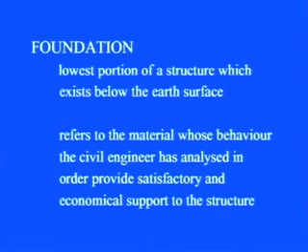Now, these foundations may be classified as different types of foundations, and as we know, they are below the earth surface, then they are out of sight. So although out of sight, the foundation is nonetheless important, because if it is deficient in design or construction, the entire building or superstructure is at risk.

And you can take the Leaning Tower of Pisa, Italy as a classical example for this. You must have heard that this Leaning Tower of Pisa was leaning towards one side. Now it has been replaced or erected to its vertical position very recently, in 2001.

Now, the function of the foundation is to transfer the load of the structure to the strata on which it is resting, and mostly it is the geological strata that consist of either soil or rock.

Now, in order to design, there are certain important considerations. One of the important considerations is the stability against shear failure. When we say shear failure, we mean that the shear stresses which are there in the soil below the foundation are within permissible limits. So they are related to the shear strength of the soil.

And another important criteria is that the foundation must not settle beyond tolerable limits to damage the structure. Now, for different types of structures and different types of soils, there are various permissible limits suggested by Indian Standard Code, and these limits are based on the performance of the structure. Let us say if a structure settles by more than a permissible value, then it may impair the functioning of the structure.

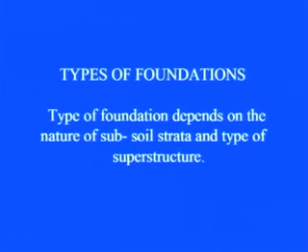Now, there are different types of foundations. Foundations may be considered as rigid foundation or flexible foundation, and foundations may be considered depending upon the depth of the foundation. The type of foundation depends on the nature of the subsoil strata and the type of the superstructure. Broadly, we classify these foundations either as shallow foundations or deep foundations.

Now, in shallow foundations, it is an arrangement where structural loads are carried by soil or rock directly under the structure. In most cases, it has been found that the depth to width ratio is kept less than 1, and this is defined by various researchers, especially Terzaghi, who gave the criteria that if the depth of the foundation to the width of the foundation is less than or equal to 1, it will be treated as a shallow foundation.

Now, in case of shallow foundation, there are many other types, and some of them are like spread footings and mat foundation or raft foundation. Spread footings, strip footings, continuous footings, rectangular footings, combined footings, all these come in the category of shallow foundations as long as this depth to width ratio is less than 1.

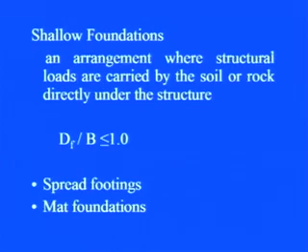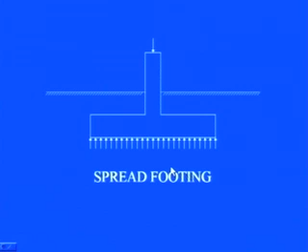Now, in this figure, you can see this is a foundation. There is a column, this is a column foundation which is a spread foundation. This load is taken up by a larger area of the soil, and this foundation is in direct contact with the soil. Now, the total load imposed by this particular column foundation, one of the columns of the superstructure, is taken up by the soil below, which may be soil or rock.

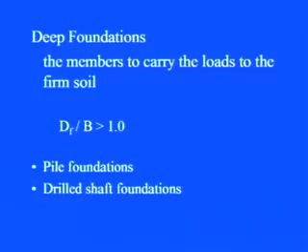In this particular case, these are the structural members called piles. Piles may be of different materials. This material transfers the load from the superstructure to the subsoil - that is the member, and this member is that foundation. The resistance is offered by the skin friction between the member and the soil, and the end bearing of the pile tip.

In the case of shallow foundations, the complete load is resisted by the end bearing, whereas in the case of pile foundations it is resisted by the end bearing as well as the friction between the soil and the member.

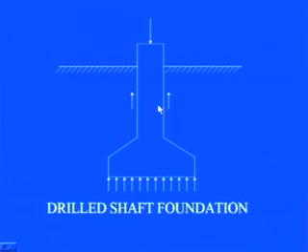Another example is the drilled shaft foundations, used maybe for the bridge pier and other structures. The important criteria which we have seen is that the foundation must not fail in shear - that criteria is the stability against shear failure.

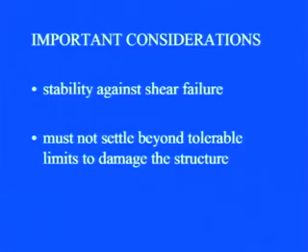It has been found that the factor of safety in shallow foundations is always kept such that the foundation does not fail in shear. Mostly the failure takes place due to excessive settlement, and especially differential settlement. We will have to keep this differential settlement within permissible limits, because differential settlement is more dangerous to the stability of the structure.

In order to find out the bearing capacity or load carrying capacity of the foundation from shear failure criteria, which we call the ultimate bearing capacity of foundation, there are many theories which were given by various researchers.

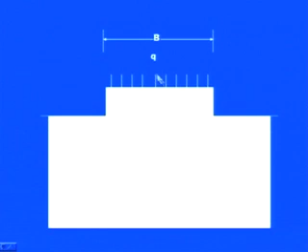Let us take an example of a foundation resting on soil. The load acting on the foundation is load intensity Q, and the width of the foundation is B. When we apply the load and keep increasing it, there is settlement of the foundation due to compression of the soil strata. Now when you increase the load per unit area, that is the pressure exerted by the foundation.

You will get a response - a load intensity versus settlement curve like this. On this axis the load per unit area is plotted, and here the settlement of the foundation is plotted. You will find that with increase in load there is increase in settlement, and a condition is reached beyond which there is no increase in load, but there is a sudden drop of the stress taken.

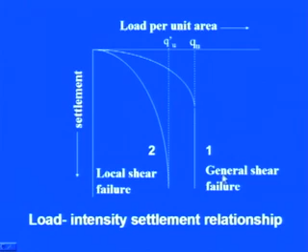This type of failure we call the general shear type of failure. In another case, there is no clear cut failure, but the stress keeps on increasing with very excessive strain and settlement. We classify these as general shear failure and local shear failure. The third category, intermediate between local shear failure and general shear failure, is the punching shear failure.

In the case of general shear failure, the situation is like this: you have this soil mass, and resting on it a foundation of width B, with the ultimate load or bearing capacity of the soil being Qu. The original ground surface is shown here. With increase in load there is settlement of the structure, and you will find there are 3 clear cut zones which are formed below the foundation.

This zone we call the elastic zone, and zones 2 and 3 are called the plastic zone. There is clear cut development of these plastic zones, and you will find an upheaval type, bulging type of surface on the ground.

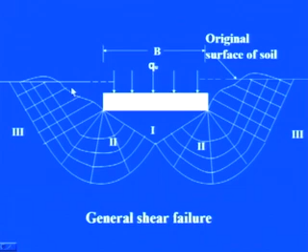This is the case of general shear failure. A triangular wedge shaped zone of soil marked 1 is pushed into the soil, which in turn presses the zones marked 2 and 3 sideways and then upward. At the ultimate pressure, which we call the ultimate bearing capacity, the soil passes into a state of plastic equilibrium, and the failure is taken by sliding.

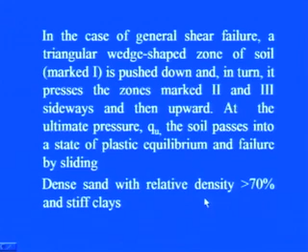Such type of failure occurs in the case of dense sand with relative density greater than 70%, and in the case of stiff clays.

Another type of failure is local shear failure, where these plastic zones are not clearly defined but subdued, and the bulging is very small compared to general shear failure. In the third type of failure, punching shear failure, there is no development of bulging, and the zones are not clearly defined.

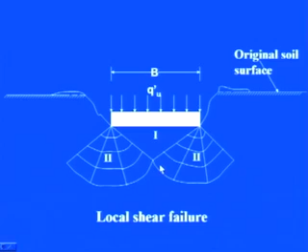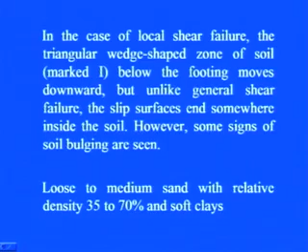In the case of local shear failure, the triangular wedge shaped zone of soil marked 1 below the footing moves downwards, but unlike general shear failure, the slip surface ends somewhere inside the soil. However, some signs of soil bulging are visible, but are not as pronounced as in general shear failure. Such failure occurs in loose to medium sand with relative density 35 to 70%, and in soft clays.

The third type of failure is punching shear failure. Here, the foundation penetrates into the soil without any bulging on the surface. The failure surface never reaches the top surface or the sand surface. This occurs in the case of relatively loose sands with relative density less than 35%.

That will depend on the relative density of the sand, how stiff or dense the stratum is. In a nutshell, in the case of stiff clays and dense sand, we normally get general shear failure, and in the case of loose sand or soft clay, we get local shear failure. In between, we get an intermediate type of failure.

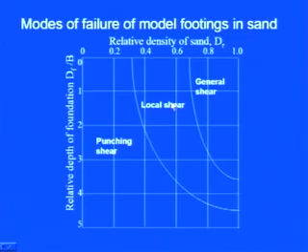There are many equations or theories developed to determine the ultimate bearing capacity of the soil. Ultimate bearing capacity is that pressure which the soil can take up before failure. The rest of the terms related to ultimate bearing capacity I will discuss in the next lecture.

As far as Terzaghi's ultimate bearing capacity equation is concerned, this equation is based on the Prandtl theory, which was postulated for soft metals.

There are some assumptions made in the case of ultimate bearing capacity given by Terzaghi. The first assumption is that he considered the case of a strip footing. In a strip footing, the length dimension is far greater than the width, and when the L by B ratio is greater than 5, we call it a strip footing.

This theory has been postulated only for shallow foundations, where depth to width ratio is less than or equal to 1, that is the shallow foundation. The third assumption taken into account is that the weight of the soil above the base of the footing may be replaced by a uniform surcharge.

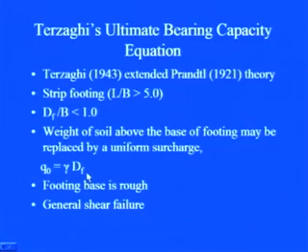All foundations are placed at a depth below the ground surface, but here that depth's effect is taken into account only by a surcharge given by Q equal to gamma into dF, where gamma is the unit weight of the soil. This means the resistance offered by the soil above this depth d is not taken into account, and that's why it is called a shallow foundation.

Another assumption is that the footing base is rough. When the footing base is rough, there is a formation of an elastic wedge below the foundation, and that wedge also penetrates into the soil along with the foundation. So the case of only general shear failure is considered, in which all the failure zones are clearly developed, and there is bulging of the soil on the surface of the footing at that level.

This is a definition sketch. You will find there is a footing column, this strip footing of width b, and it is resting at a depth dF below the ground surface. The effect of this depth is taken into account by this surcharge Q0, that is equal to gamma dF, and the level of the foundation is shown by this line, and these arrows are showing that surcharge.

There are formations of different wedges: wedge number 1, wedge number 2, and wedge number 3 on both sides. The inclination - this footing is considered as rough. You will find that this is a triangular wedge, which we call the elastic wedge, which also penetrates along with the foundation, and it pushes the soil, causing the formation of these plastic zones.

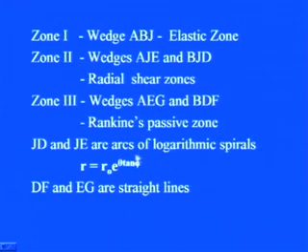Then JD and JE are arcs of logarithmic spirals, given by r equal to r0 e to the power theta into tan phi. So these spirals are also a function of the strength parameter phi of the soil, and DF and EG are straight lines. So this is the geometry of the wedge.

Now let us imagine that AJ and BJ are two walls pushing the soil wedges AJEG and BJDF respectively to cause passive earth pressure conditions. When this soil is pushed by this particular wedge, passive earth pressure conditions are developed here, and because of this pushing, these shear zones are developed and the soil is pushed like this, and you get a bulging somewhere here, since in this particular case we are considering the effect of this.

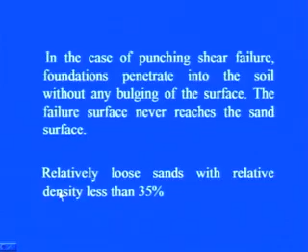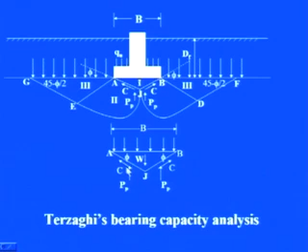Here the angle of this wedge is equal to phi. So this is the passive earth pressure condition. This passive pressure will be inclined at an angle delta, the angle of friction between this material and this material. In this particular case both materials are soil, so this will be taken as the angle of wall friction, delta, which will be equal to phi, and hence this PP will be perpendicular, meaning it will act in the direction of the weight.

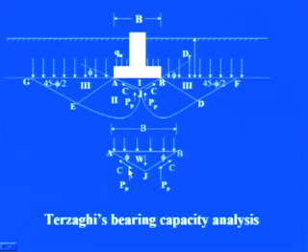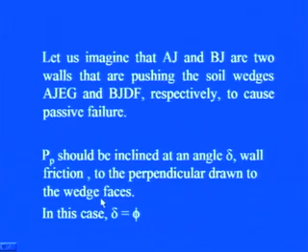So, it is acting in the vertical direction, inclined at delta with the normal to AJ. In this case delta will be equal to phi, where delta is the angle of wall friction. Here these walls are made up of soil, so there is soil to soil contact, delta equals phi. Now, as AJ and BJ are inclined at phi to horizontal, PP should be vertical.

Now what we will have to do is consider the equilibrium of wedge ABJ per unit length. When we consider static equilibrium, note that we are not considering moment equilibrium, although the errors involved may be very small and can be neglected. But in this case it should be remembered that we do not consider moment equilibrium of the wedge.

The force acting downward will be equal to the force acting upward. The downward force will be due to the ultimate bearing capacity of the soil, acting per unit length on the width of the foundation, plus the weight vector acting downward, the component of the cohesion acting on the side walls of the wedge in the vertical direction, and the force due to passive earth pressure acting in the vertical direction. Here I have considered B as half of the width, just for simplification.

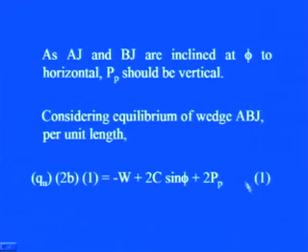So this is equal to QU into 2B, where the width is 2B, acting vertically downward, per unit length, multiplied by unity. Here the weight vector is acting vertically downward, and we take its vertical component along with the vertical component here.

For static equilibrium these vertical forces are equated. Here W is the weight of the soil wedge ABJ, which can be determined by the geometry. If B is the width and B is half of the width, then the weight will be equal to the area of the triangle multiplied by 1 multiplied by unit weight, which comes out to be equal to gamma B squared tan phi.

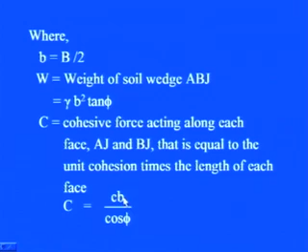Now, C is the cohesive force acting along each face AJ and BJ. So we will have 2C, since there are 2 faces, equal to the unit cohesion times the length of each face. The length will come out to be equal to C into B upon cos of phi.

Substituting these in equation 1, this becomes 2B into QU equal to 2PP plus 2BC tan phi minus gamma B squared tan phi. This can also be written as QU equal to PP upon B plus C tan phi minus gamma B upon 2 tan phi. This is equation number 3.

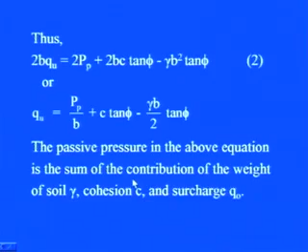Now, the passive pressure in the above equation is the sum of the contribution of the weight of the soil, cohesion, and surcharge. What we can do is separate all these three by considering only one at a time, keeping the other two as value 0.

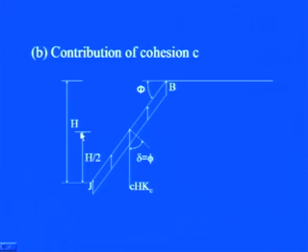Similar to this is the contribution of the cohesion. Cohesion is considered uniform all along side JB, and hence the contribution is given by C into H into Kc, acting at a height H by 2, whereas in the earlier slide you must have seen it acting at H by 3.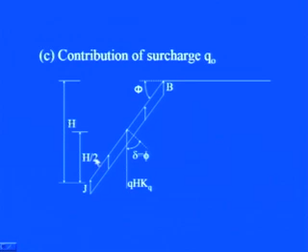You can find it out from the Rankine earth pressure theory. Similar to the contribution of surcharge Q0, that is gamma into dF. Now, that surcharge pressure distribution is uniform throughout the height of the wall.

Here this will act at a height of H by 2, with magnitude equal to Q into H into KQ, where KQ is the coefficient due to surcharge. Thus we can write equation 4 as Pp equal to 0.5 gamma B tan square phi K gamma plus C B tan square K C Q0 B tan of phi KQ, where K gamma, KC, KQ are the earth pressure coefficients, functions of the angle of shearing resistance of the soil.

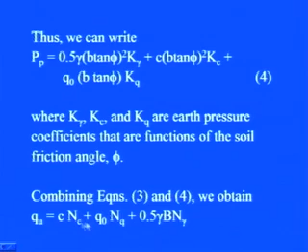When you combine equations 3 and 4, we obtain Qu equal to C Nc plus Q0 Nq plus 0.5 gamma B Ngamma. These Nc, Nq and Ngamma are the bearing capacity factors, functions of the strength parameter phi, where Nc is given by tan phi Kc plus 1, Nq is given by Kq tan phi, and Ngamma is given by 0.5 tan phi K gamma tan phi minus 1. The terms Nc, Nq, Ngamma represent respectively the contributions of cohesion, surcharge and unit weight of soil to the ultimate bearing capacity.

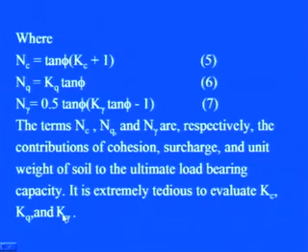It is extremely tedious to determine the values Kc, Kq and K gamma. So Terzaghi developed the following equations based on semi-empirical theories: Nq equal to a square upon 2 cos square of 45 plus phi by 2, where a is equal to e raised to eta tan phi, eta is given by 3 by 4 pi minus phi by 2, and Nc is equal to Nq minus 1 into cot phi, and Ngamma equal to half tan phi k gamma upon cos square phi minus 1.

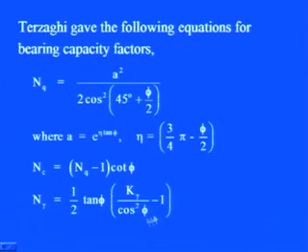Terzaghi's bearing capacity factors can be determined from these equations, and they are tabulated in this chart with various values of phi from 0 to 50 degrees, with corresponding Nc, Nq, and Ngamma. For example, for phi equal to 0, Nc is 5.7, Nq equal to 1, and Ngamma equal to 0. Similarly, for 50 degrees, Nc equal to 347.5, Nq equal to 415.1, and Ngamma equal to 1153.0.

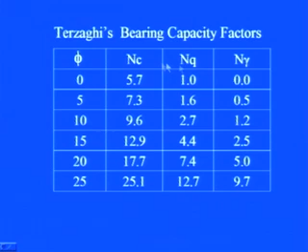Depending upon the angle of shearing resistance, which we can find from different tests, we pick the corresponding values of Nc, Nq, Ngamma and substitute them in Terzaghi's bearing capacity equation to find the ultimate bearing capacity of the soil.

Terzaghi actually used an approximate method to determine ultimate bearing capacity Q. The principle of approximation follows: if C equal to 0 and surcharge equal to 0, that is depth equal to 0, we have Q equal to Q gamma, the component of only the weight. Similarly, when gamma equal to 0, meaning we assume the soil to be weightless, and Q equal to 0, then Q equal to Qc, the component of only the cohesion.

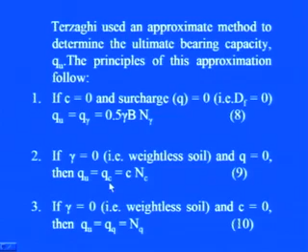Similarly, when gamma equal to 0 and C equal to 0, we have Qu given by Q times Nq only, due to only the surcharge. Then by the method of superposition, when the effects of unit weight of soil, cohesion and surcharge are considered together, we get the equation Q equal to Qc plus Qq plus Qgamma, given by C Nc plus Q Nq plus 0.5 gamma B Ngamma, the same bearing capacity equation we derived earlier.

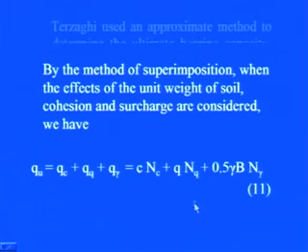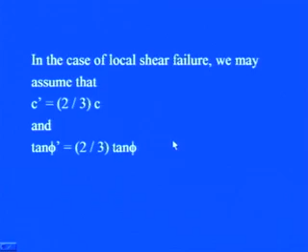In the case of local shear failure, when phi is less than 28 degrees, we take the parameters as C dash, that is 2/3 of C, and tan phi dash, that is equal to 2/3 of tan phi. We determine C dash and phi dash, find the corresponding bearing capacity factors, and then determine the ultimate bearing capacity theory.